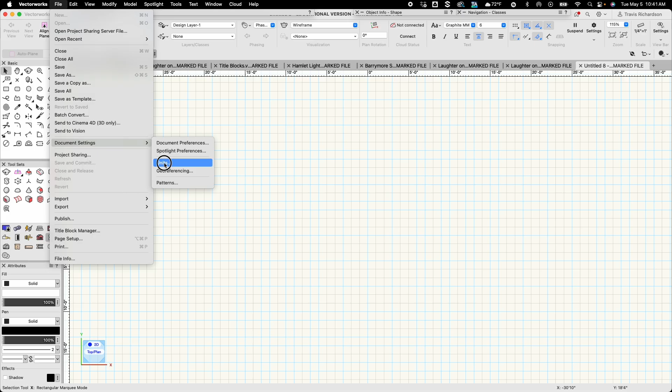So I'm going to start by creating a new file in Vectorworks. It's just going to be a blank document. I don't need it to be a template in this case. And as always, I'm going to come up and change my units to feet and inches, rounding fractional, and the precision 1/8 of an inch. Okay. And I'm going to come over to my attributes palette and change my line thickness to 7. And from there, I'm ready to start.

So as you can see from the example provided, the base of this lamppost is a hexagon that's 1 foot 6 inches across. So for that, I'm going to use my regular polygon tool. From here, I am in inscribed mode. And I want the number of sides to be 6 because I want it to be a hexagon. So because I want it to be 18 inches across and I'm working essentially from the center out on the radius, I'm going to hit Tab and make that 9 inches. And then I'll click to complete that. And there is my hexagon.

I'm going to go ahead and duplicate this and just drag the duplication off to the side. I'll use that a little bit later. And then I'll select my original hexagon again, and I'm going to extrude it 4 inches. From there, I'm going to take my 3D flyover tool and just do this to verify that extrusion. Sure enough, there I've got my extruded hexagon. And for now, I'm going to go ahead and just go back into a top plan view.

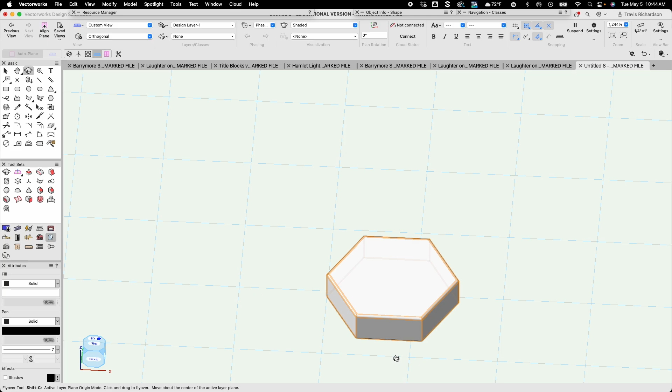I want to set my constant radius for 1/4 of an inch in this case. So once that's all set, I'm going to click on this green check mark. And then again, if I go to my 3D flyover and deselect it, we can see that I now have a rounded edge of my hexagon. For now, I'm just going to go back into a top plan view.

Next, I'm going to draw a circle with either a 1 foot diameter or a 6 inch radius. So I'll activate my circle tool. And in my case, I'm set in radius mode. That's just fine. So I'll tab in and give it a 6 inch radius. There we go. Click to complete that. And I'm going to go ahead and duplicate this circle and drag that duplication onto the 2D hexagon that I drew earlier. Again, I'll use those a little bit later on. And then I'm going to come back and select my original circle again, and I'm going to extrude it 1 inch.

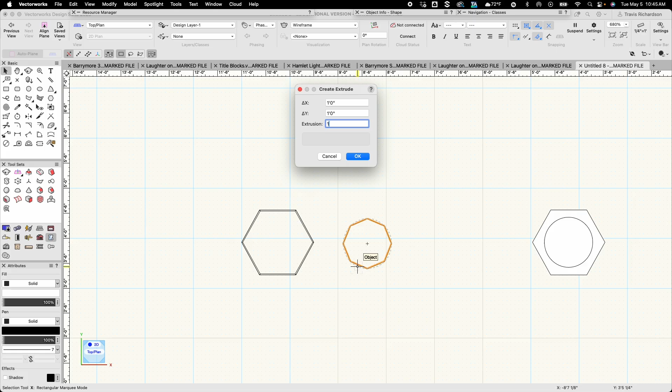From here, I'm going to go to a front view. And there's my circle. And I want to use the Fillet Edge tool again, both on the top and bottom edge of my circle. So I'll select my Fillet Edge tool. I'm going to keep my constant radius at 1/4 of an inch. So I'm going to select the top edge and the bottom edge, and then click the green check.

And now my circle has rounded edges. From there, I'm going to go back to a top plan view. And I'm going to drag this circle into the center of my extruded hexagon. And then I'll go back to a front view and see that it's basically sitting in the middle of it, which is definitely not where I want it.

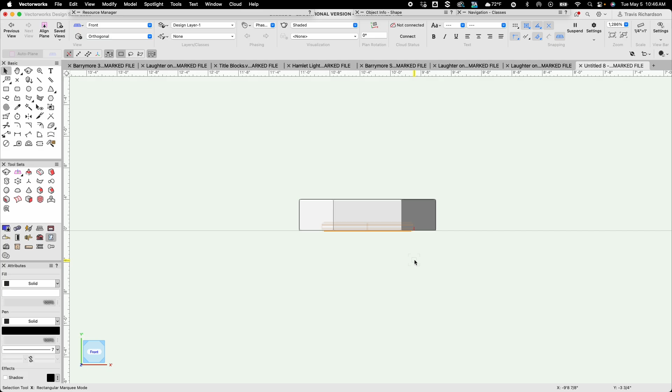So I'm just going to go ahead and move it. I'm going to move it 4 inches on the Y offset. And it's going to set it right on top of that hexagon.

I need one more of those, so I'm going to go ahead and duplicate that circle, and I'm going to move that duplication up 1 inch. Oh, I did that wrong. That was on the x-axis, so I'm going to move it 0 on x, 1 on the y. There we go. Now I have 2 circles sitting on top of my hexagon. And for now, again, I'm just going to go back into a top plan view.

Continuing to work my way up the lamppost, I'm going to go ahead and draw another circle with a 9-inch diameter. So I'll activate my circle tool, and this time I'm going to go into diameter mode, and it wants to be a diameter of 9 inches. So I'll start my circle, tab in, tell it 9 inches, and click to complete that. There we go.

And then I'm going to offset this inside of it. So I'm going to go to my offset tool in my basic tool set. And I want to set my distance to 3/4 of an inch. And then I'm going to click inside this circle so that I'm offsetting to the inside. And it's going to draw me a second circle right there.

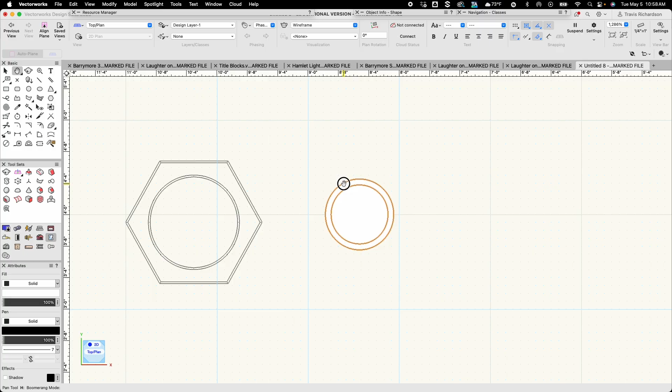I'm going to switch back to my selection tool and select both of those circles. And then I'm going to come up to Modify and Clip Surface. It's going to select the inner surface, which is the one I want to get rid of, and I'll just hit Delete. And now it leaves me with a ring, which is exactly what I'm looking for.

From here, I'm going to activate my rectangle tool. There's going to be a series of rectangles all around this that are going to get extruded later on. So I'll activate my rectangle tool, and I'm going to draw a 1 inch by 1 inch rectangle, and I'm going to grab the bottom center smart point of that rectangle and drag it to the top center smart point of my outer circle.

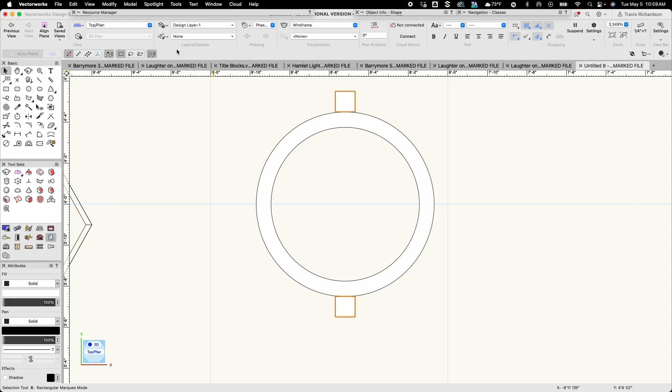There we go. While I still have that selected, I'm going to go ahead and mirror that rectangle horizontally across my ring, so I've got one at the bottom. And then I'm going to select both of those rectangles and duplicate them. And then I want to rotate those duplications. So I'm going to come to Modify and Rotate, and then Rotate again. And I want them to rotate on a 30-degree angle. Okay, and there's my new rectangles.

I'm going to repeat this process 4 more times so that the rectangles surround the entirety of this ring. So again, I'm going to duplicate those, rotate 30 degrees, and one more time. Great. So now I've got all of my rectangles duplicated. So we're going to have 12 total of those.

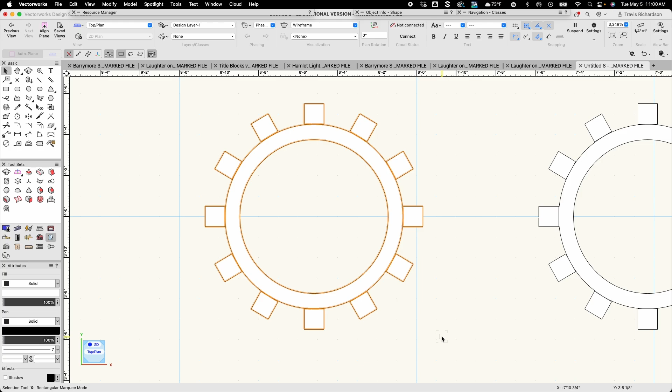From here, I'm actually going to drag a selection marquee around all of these objects, and I'm going to duplicate it like I did before, and I'm going to grab that duplication and just kind of move it off to the side over here. Again, I'll deal with that later on. And then I'm going to draw another selection marquee around my original part to select it, and then I'm going to go ahead and extrude it by 2 feet 3 inches.

I'm going to zoom out a little bit, and using my center smart point, I'm going to click and grab this extrusion and drag it on top to the center smart point of the rest of my lamppost. And then from there, I'll go into a front view, and you can see that new extrusion, but again, it's set down too low, so we need to move that a bit. So I'm going to go ahead and move it 6 inches on the Y offset. So it's going to set on top of that base that we constructed so far.

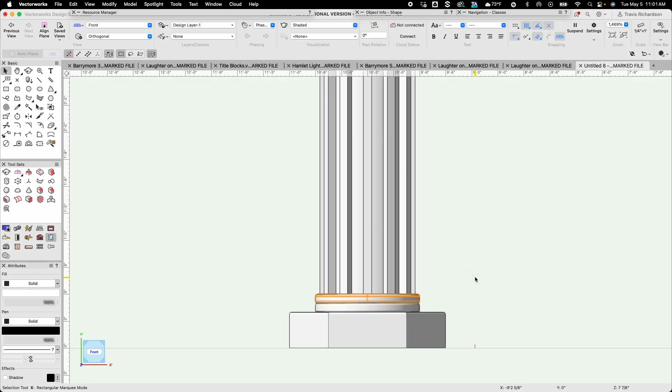From here, I want one of these circles to sit on top of this new extrusion, so I'm going to go ahead and just select that bottom one and duplicate it. And I'm going to move that duplication up 2 feet 4 inches. And then when I zoom out, you can see that it's sitting on top. If I use my 3D flyover, we start to see that lamppost base kind of taking shape.

For now, I'm going to go ahead and return to a top plan view. I'm going to draw a selection marquee around this ring and my rectangles, and group those together so they all act as one unit. Then I'll take that center smart point and drag it to the center of the 2D version I have going on over here.

Continuing to work my way up the lamppost, I'm going to draw another circle. I'll activate my circle tool, and this one I want to have an 8-inch diameter. I'm going to start that, tab in, I'm in diameter mode, so I'm good to go. 8 inches, and click to complete.

There's my 8-inch circle. Like the other ones, I'm going to duplicate that and drag that duplication out of the way for a second. Then I'll select the original circle that I drew, and extrude this by 1/2 inch.

From there, I'm going to go into a front view, and here's my new extruded circle. I'm going to use the fillet edge tool again to round both the top and bottom edges of this. I'll select my fillet edge tool, change my constant radius to 1/8 of an inch, and select both the top edge and the bottom edge of that circle, and click my check mark.

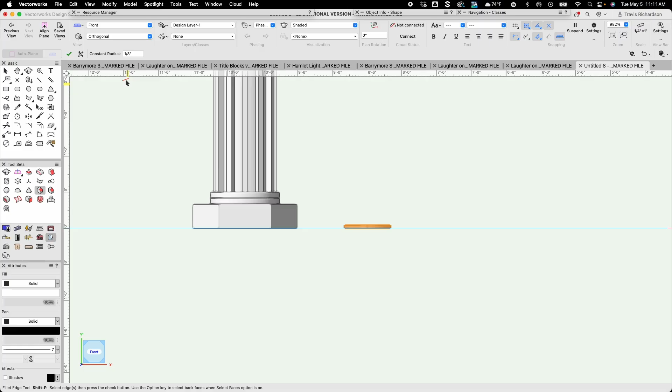From here, I'm going to go back to a top plan view, and with my selection tool, drag the center of this new extrusion on top of the other ones making up my lamppost. Once I have that centered, I'll go back to a front view, and here is my new circle extrusion that's much lower than I want it to be.

So I'm going to move it on the Y offset, 2 feet 10 inches. Then when I pan up, here's my new circle sitting up on top of that pillar.

I need 3 more of those, so I'm going to duplicate that and move it 1/2 inch, and do that 2 more times until I have 4 of those circles stacked up on top of each other. I'm going to deselect that last extrusion and return to a top plan view.

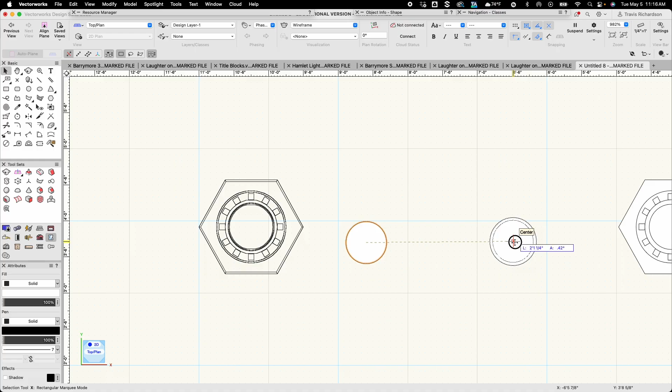Next, I'm going to draw another circle. I'll activate my circle tool, and this time it's going to have a diameter of 7 inches. Once I've set that, I'm going to duplicate it and drag that duplication into the middle of that 8-inch diameter circle I set off to the side earlier. Then I'll click that initial 7-inch circle, and extrude it 2 inches.

From there, I'm going to go back to a front view. There it is. Again I want to soften those edges, so I'll use the fillet edge tool again, switch my constant radius back to 1/4 inch, select both the top and bottom edge, and click my check mark, and there I've got my filleted edges.

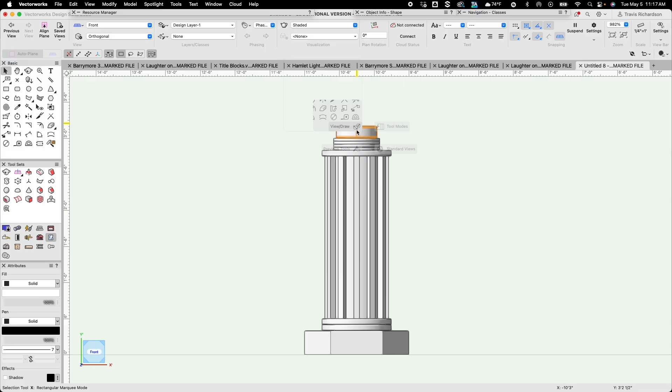From here, I'm going to go back to a top plan view, and using my center smart point, drag that on top of my lamppost, then go back to a front view, and there it is. Again we need to raise that up, so I'll move it 3 feet on the Y-axis, or Y offset, setting it on top of my other objects. For now, I'm going to deselect that and go back to a top plan view.

Next, I'm going to draw yet another circle, this one 3 inches in diameter, so I'll activate my circle tool and set it to 3 inches. Great, there we go. We're going to make a similar shape to what we did earlier, so I'll take my rectangle tool and create a rectangle that is 1/2 inch by 1/2 inch. There we go. Again, using my bottom center smart point, I'm going to drag it to the top center smart point of my circle.

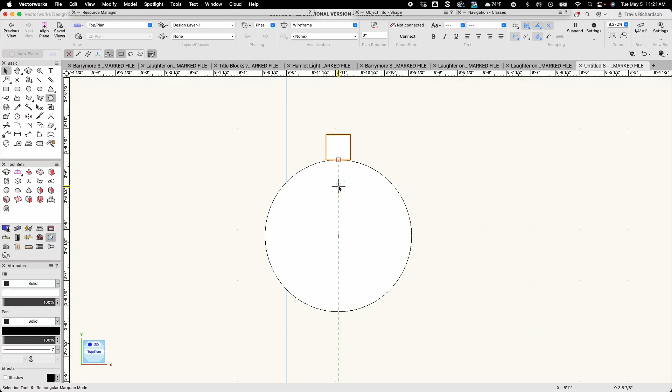Then I'm going to mirror that shape across the circle, and duplicate both of those, and modify, rotate, rotate 30 degrees, just like we did before. I'm going to continue working around my outer circle, duplicating again.

Great, now I've got all of my rectangular duplications surrounding that circle.

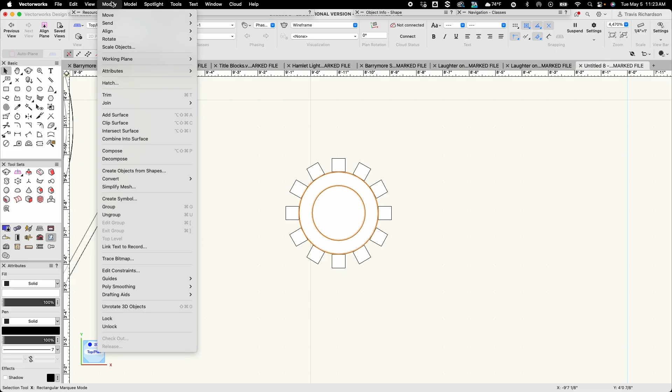From here, I'm going to select my circle and go back to the offset tool. I need to create that ring we had before, so I'll select my offset tool and change the offset to 1/2 inch, and offset this to the middle. Then I'll go back to my selection tool, select both of my circles, and modify clip surface. It's going to select that inner circle, and I'll hit delete, and now I've got the ring I had before.

I'm going to draw a selection marquee around all of these objects and duplicate them again. Just drag that duplication off to the side, then group it with Command G so that's all one group. I'll grab this and drag it right on top of those other circles I had been working with.

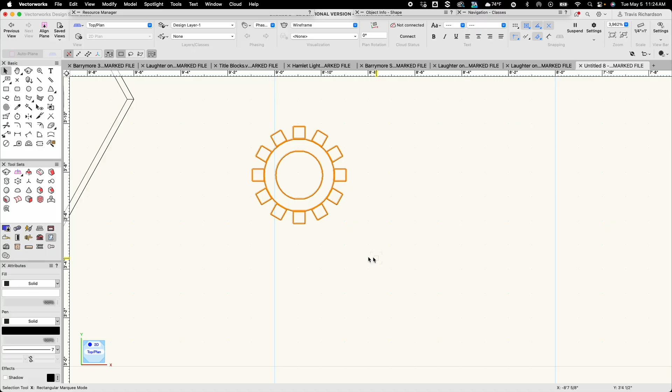I'm going to come back to this original shape I've been working on, and draw a rectangle marquee or selection marquee around all of those objects to select them, and extrude that 5 feet. Once I've extruded that, I'll grab its center smart point and drag it to the center of my lamppost.

Then go back to a front view. There it is. Obviously I need to raise that up, so I'm going to move it 3 feet 2 inches, and that'll set it up on top of that other object. Now my lamppost is really starting to take some shape. For now, I'm going to go back to a top plan view.

Next, I'm going to draw another circle with a 5-inch diameter. I don't need to duplicate this one, but I am going to extrude it 1/2 inch. Then I'll go into my front view and fillet those edges so they're curved, using my fillet edge tool. Because it's only extruded 1/2 inch, I'm going to change the constant radius to 1/8 of an inch, and select both my top and bottom edges and click my check mark.

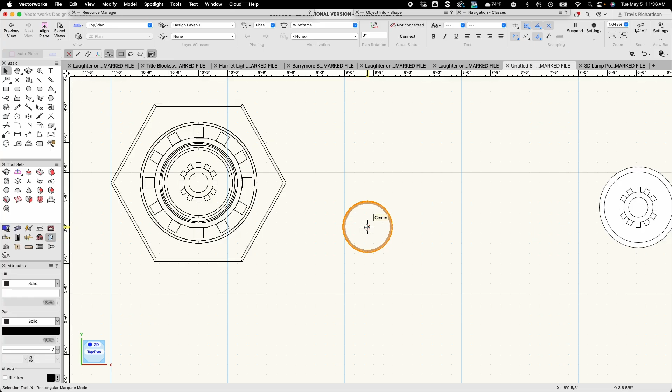From there, I'll go back to a top plan view and center this right on top of the rest of my lamppost, then go back to a front view. Obviously I need to raise that up, so I'm going to move it 8 feet 2 inches, zoom out and pan up, and there's my circle I've just created.

From here, I'll go back to a top plan view and draw another circle that is 4 inches in diameter. Again, I don't need to duplicate this one, and I'm going to extrude this circle by 1/2 inch.

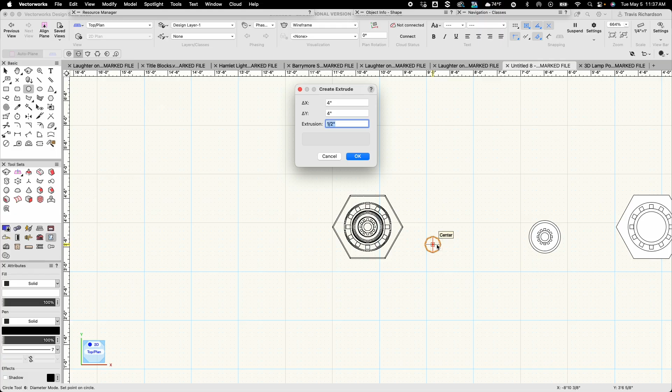Then back to a front view. I want to fillet these edges, so again with my fillet edge tool, changing my constant radius back to 1/4 of an inch, and clicking on the top edge and the bottom edge of my circle, then clicking the check.

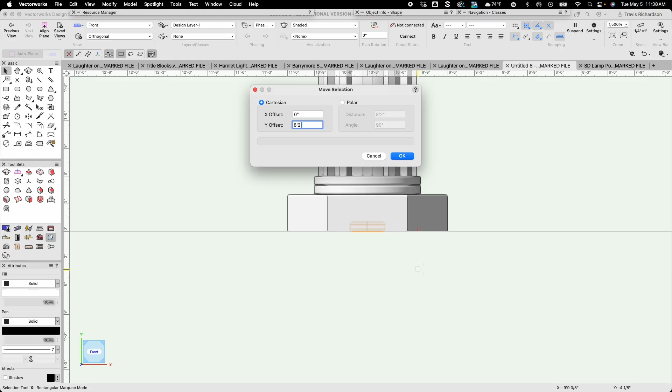There we go. Going back to a top plan view, I'll drag the center of this into the center of my lamppost and go back to a front view. And there it is. I'm going to raise that up 8 feet, 2.5 inches. So there's my newest circle.

I'm actually going to duplicate this one and move it up on top so I've got like a little sandwich. I'm going to select that circle extrusion, duplicate it, and move it up 1/2 inch. There we go, so it's sitting on top. From here, I'll go back to a top plan view.

From here, I'm going to draw a rectangle, activating my rectangle tool, and draw a rectangle that is 6 inches by 6 inches. There we go. I'm going to extrude it by 1/2 inch, then with that extrusion, I'll grab the center and drag it into the center of my lamppost and switch to a front view.

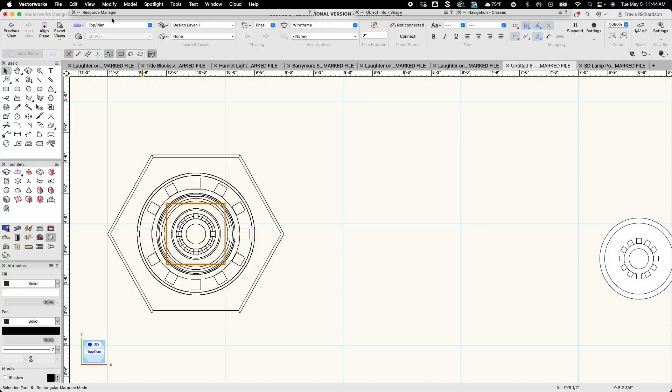Here's my kind of ghosted extruded rectangle that I need to move, so I'm going to move it up 8 feet, 4 inches. Okay, and then when I pan up, there's my rectangle sitting on top of my lamppost.

From here, I'm going to deselect that and go back to a top plan drawing or top plan view. And I'm going to go ahead and save my drawing. Next we'll start working on the lamp housing of the lamppost.

To start my lamp housing, I'm going to go ahead and draw another 6 inch by 6 inch rectangle. Oops, that's a circle. There we go. 6 inch by 6 inch.

And then I'm going to go ahead and offset it by 1/2 inch. So I'm going to select my offset tool, verify that I'm in 1/2 inch, and I'm going to click to the inside of it so I make a smaller surface, smaller rectangle. With my selection tool, I'm going to select both of those and say modify and clip surface. I'll delete that center section.

And then I'm going to select this sort of ringed rectangle, and I'm going to extrude it 1/2 inch.

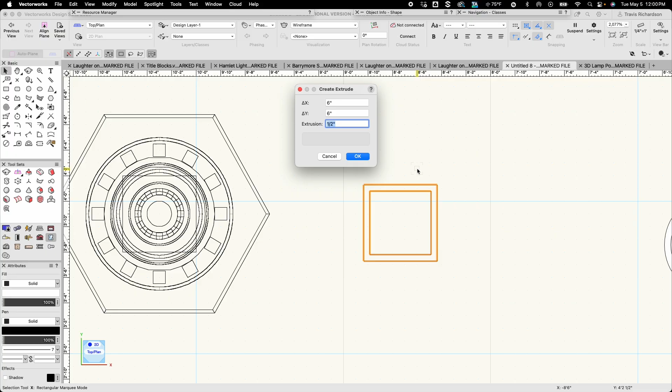From here, I'm going to repeat that process, creating a 12 by 12 inch rectangle right on top of this one. So again, I'm going to take my rectangle tool, and I'm going to say I want it 12 by 12. There we go. I'm going to drag that to the center of this rectangle.

And from here, again, I'm going to offset that inside by 1/2 inch. And I'll select both of those, modify, clip surface, get rid of that. I'll select this one, and I'm going to extrude it by 1/2 inch as well.

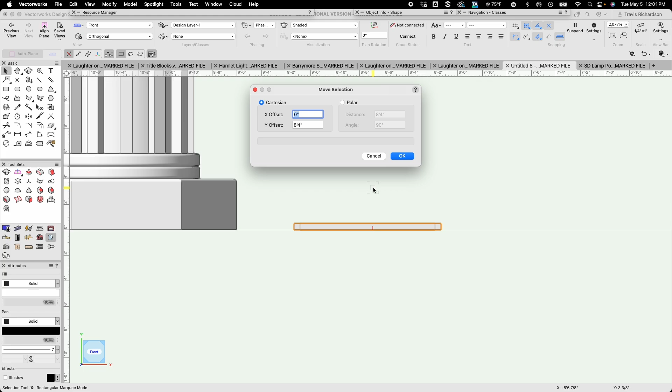Next, I'm going to zoom in on this just so it's a little easier to work on. And I'm going to draw a vertical line from the lower left-hand corner of this lower extruded rectangle. Doesn't matter how long it is, I just need it to come up a little ways.

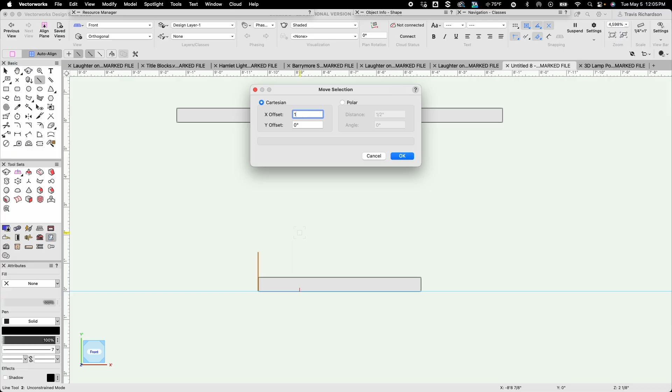And then I'm going to move that line 1/2 inch on the X offset, 0 on the Y, so I'm just moving it over. And really, I'm just giving myself a reference point of this intersection right here.

From here, I'm going to select my polyline tool or my polygon tool, either one. If I select the polygon tool, I need to make sure that I'm in vertex mode. If I select the polyline tool, I need to be in corner vertex mode.

And I'm going to start my polyline at the lower left-hand corner of the top extrusion. So I'm going to click there and tab in and make the first vertex 1/2 inch. I'll click to set that point. And then my next point is going to be the intersection of this line and this extrusion right there.

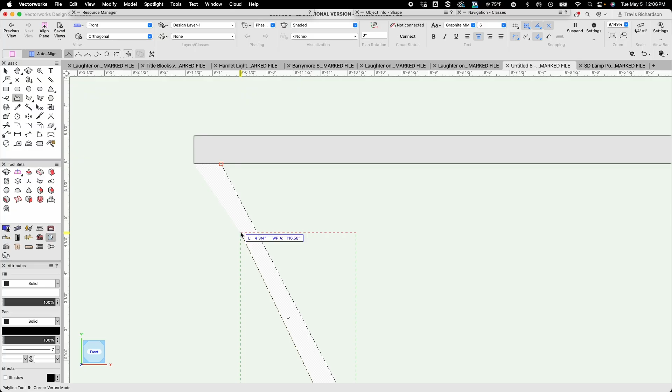I'll come over to the edge of the bottom extrusion and then back up to the corner of the top one to complete my polygon. Then I'm going to select this line that I made for reference and just delete it.

From here, I'm going to have this polygon selected, and I'm going to go ahead and extrude it 1/2 inch. With that still selected, I'm going to switch to a left view.

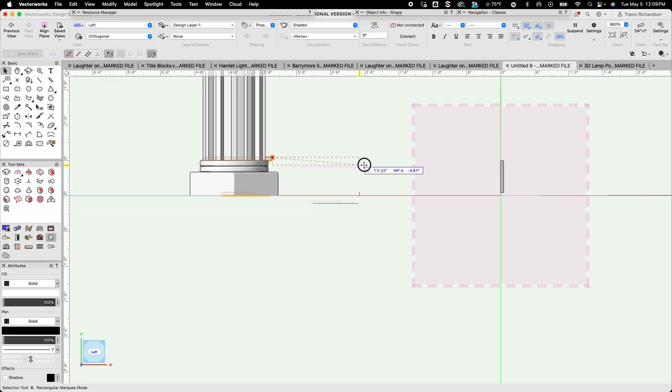And we can see that the polygon that I just drew does not intersect my other two, and actually I can't even see my other two at the moment because they are hidden behind the rest of that column. So I'm going to just draw a marquee here and drag these over so I can see them. There we go. So now I need this extrusion to intersect these two.

So I'm going to grab the endpoint in the top right corner, and I'm going to drag it over till it intersects the bottom right corner of the top extrusion. From here, I'm going to go ahead and go back to a top plan view, and there's the 2D representation of that extruded polygon I just made.

From here, I need to rotate and resize this polygon extrusion a little bit. So with it selected, I'm going to go ahead and grab my rotate tool.

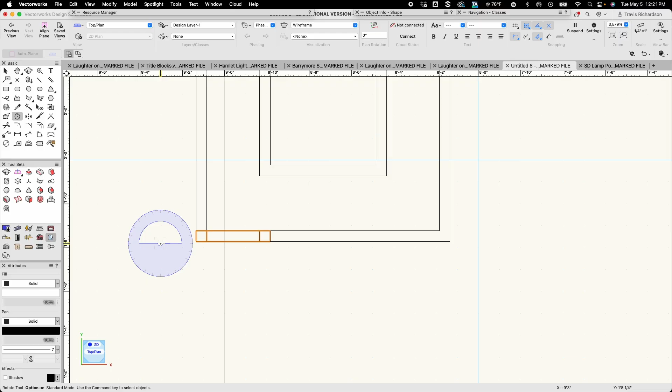And I'm going to grab the left midpoint smart point and click here. And then I'm going to grab the right midpoint smart point. And then I'm going to rotate it till it's even with the corner of the smaller rectangle. There we go. Now I need to resize it so that it extends all the way and connects with those two.

So I'm going to double click to enter that extrusion. And I want to make sure that in my modes, I'm on single object interactive scaling mode. This is going to be the easier one to work with and is also going to be a little bit more accurate. So I'm going to grab this handle, this endpoint handle right here, and I'm just going to drag it till it intersects with the inner rectangle or the inner edge of the smaller rectangle, and click to resize that. And then I'll come up to exit extrude since I'm done resizing it.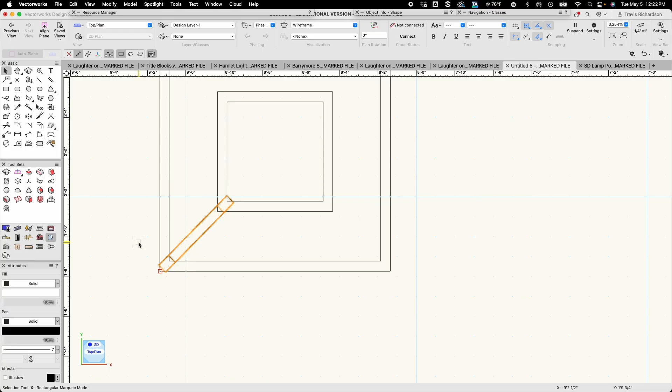And then I need to rotate it one more time so that it's even with this corner. So I'm going to grab my rotate tool again, and I'm going to come from this midpoint to this midpoint, and then click on the endpoint of the larger rectangle to rotate there. From there, I can go to my 3D flyover and do some rotation, and we can see that my polygon is now at an angle and it's intersecting both the upper and the lower rectangles. For now, I'm going to go back to a top plan view.

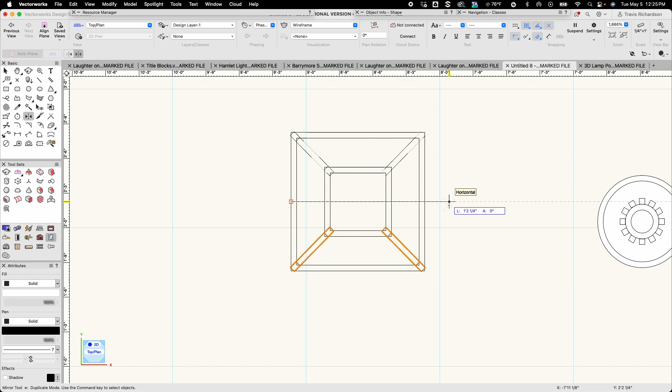From here, I need to mirror this extruded polygon so that I've got one in each of the corners. So with it selected, I'm going to grab my mirror tool, and I'm going to go from the midpoint of this outer rectangle on the bottom and drag it vertically to create this one. And then I will select both of those and select my mirror tool again, and I'll go from the midpoint on the left-hand edge and mirror it that way. So now I've got all four of those. And now again, if I go to my 3D flyover and I do some rotation, we can see how I've kind of created a little basket shape that's going to be the bottom of my lamp housing.

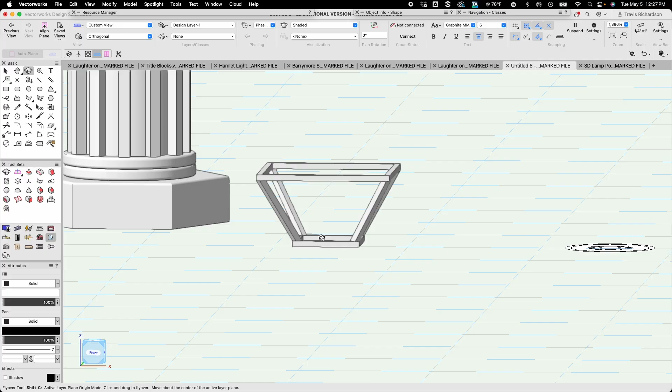Next, I need to turn the bottom of this lamp housing into one solid object. So to do this, I'm going to come to a front view and just draw a selection marquee around all of those elements. Just makes it a little bit easier for them to be selected. And because I'm dealing with a 3D object here, I'm going to come up to Model and Add Solids. And now this should be one solid object that can be moved as one individual thing. From here, I'm going to go back to a top plan view, and I'm going to duplicate this solid, and I'm just going to drag it off to the side near my other duplications to be used later on.

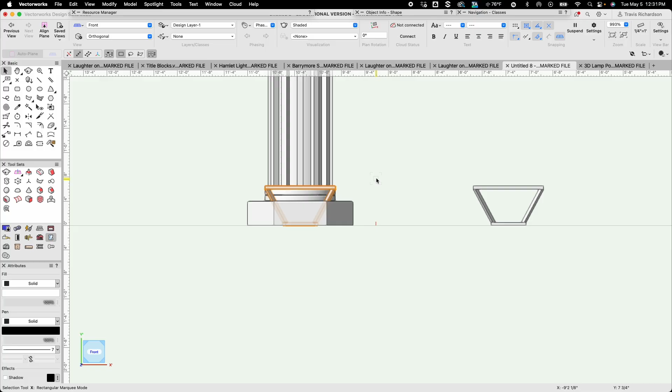Next, I need to move the bottom half of my lamp housing basket up on top of the rest of my lamp post. So I'm going to zoom in and grab the top right endpoint smart point of the smaller rectangle, and I'm going to drag it up and zoom in and place it right on the corner of this other rectangle, and that should center it right in the middle of my lamp post. From there, I'm going to switch to a front view, and you can see here's my basket of my lamp post, and obviously we need to move it up. So we're going to move, and it's going to be 0 on the X offset, and 8 feet 4.5 inches on the Y. And then if I zoom out, you can see that the bottom half of my lamp housing basket is sitting right on top of my lamp post.

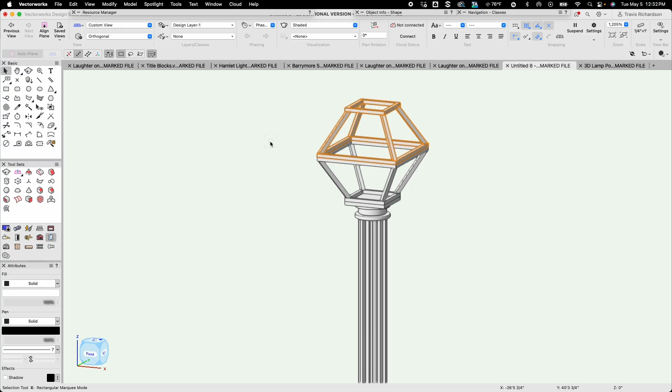From here, with it still selected, I want to mirror it, so I have two halves. So I'm going to select my mirror tool, and I'm going to mirror it right across this top edge so that I have two pieces of that. And just to look at it, I'm going to grab my flyover, so we can kind of see what that's looking like. Looks pretty good. And to finish that off, I'm going to give it a little top cap, so I'm going to come back to a top plan view, and I'm going to draw another 6 by 6 inch rectangle, and I'm going to extrude that 1 inch.

I'm going to drag that into the center of my lamp post and go back to a front view. And I'm going to move this rectangle up 9 feet 5.5 inches. Should put it on the top of my lamp housing. Let's zoom out and see. Yep, there it is. There's the top little cap section of my lamp.

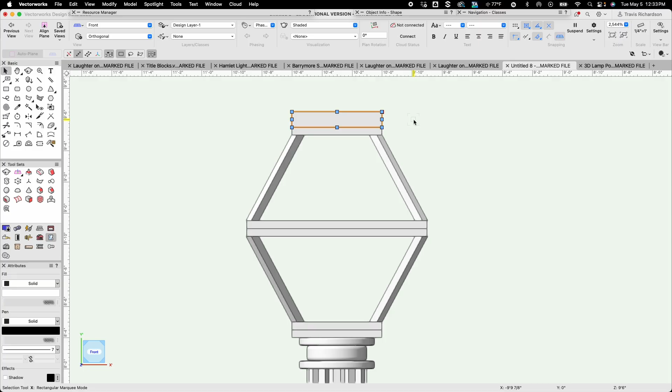For now, I'm going to go back to a top plan view, and next we'll work on the socket for the light bulb. Next, I'm going to work on the light bulb socket for my lamp post. So I'm going to zoom out here just a little bit, and I'm going to draw a new circle that is 2 inches in diameter. There we go. And I'm going to extrude it by 1/8 of an inch.

Okay. And then I'm going to draw another circle with 1 1/4 inch diameter. And I'm going to extrude it 1 inch. From here, we're going to use a new tool in the 3D modeling tool set. It's going to be this one over here. It is the Shell Solid tool. And basically what it's going to do is kind of hollow out the cylindrical extrusion that I just made.

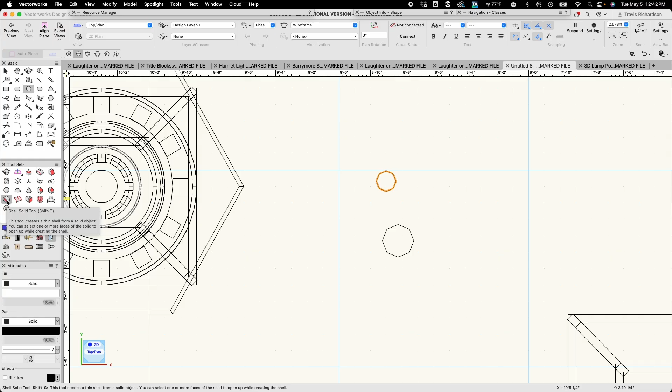So just for point of reference, if we go to our flyover, this is a solid cylinder that I've got. Oops. And I want to essentially hollow part of this out. So going back to a top plan view, I've got that selected. I'm going to select my shell solid tool. I want to change my thickness to 1/8 of an inch if it isn't already. And I'm going to select that circle so it's highlighted and click my check mark.

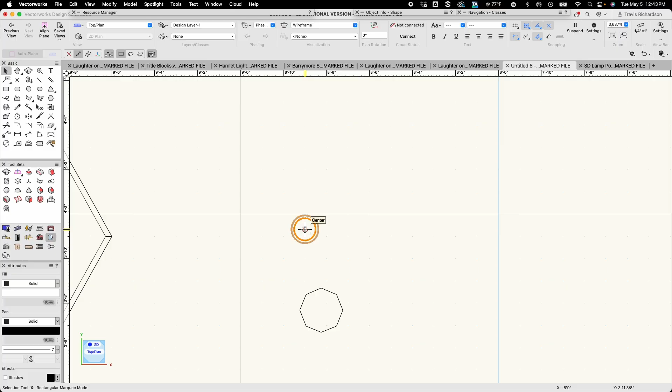And now it looks like a ring, but if I go into my 3D flyover and rotate it, we can see that that is actually kind of hollowed out now, but still has a little bit of a bottom to it. I'm going to come back to a top plan view, and I'm going to grab the extrusion that I just hollowed out and put it on top of the larger one. So that's centered up. From there, I'm going to go to a front view, and obviously I need to lift this up the thickness of its base. So we're just going to move that 1/8 of an inch on the Y offset. There we go.

And now I'm going to select both of those items and turn it into one solid thing. So again, because I'm dealing with a 3-dimensional object, I'm going to say Model, Add Solids. And now that is one entire object in and of itself. From here, I need to position this socket on top of my lamppost. So I'm going to go back to a top plan view. And I'm going to grab the center of the socket I just created and put it right in the center of my lamppost. And then go back to a front view where obviously I need to move it up.

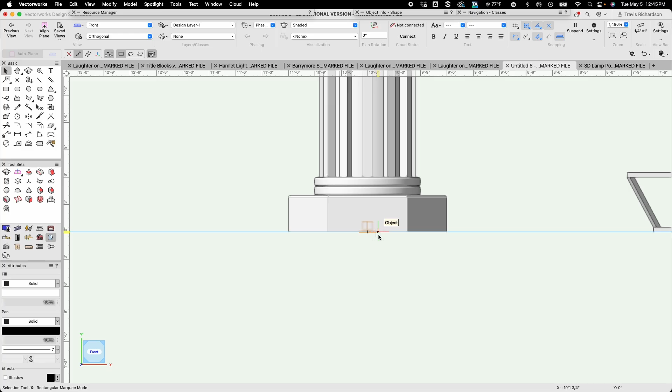And I'm going to move this socket up 8 feet 5 inches. And then when I pan up here, we can see that my socket is basically at the bottom of the basket that I have created as my lamp housing.

Next, I'm going to put a light bulb into my socket, or what we would call an A-lamp. So I'm going to open up my resource manager here. I've already got one set because I've done this once already, but in the search field, if you just search for A-lamp, it'll give you a whole bunch of different options. You want lighting A-19 shell. So you're just going to double click on that one and it'll bring it into the drawing.

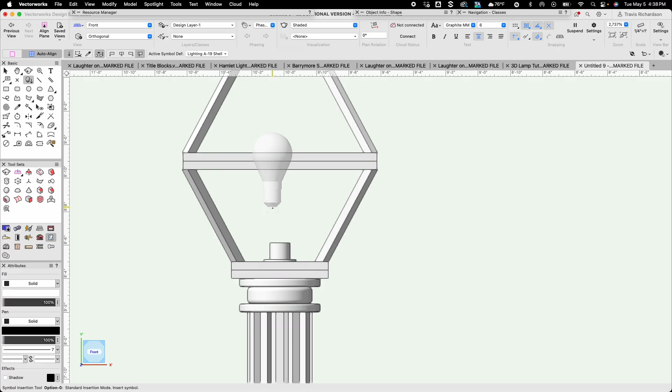You can see that the insertion point is on the bottom in the middle of the lamp. So we're going to zoom in here and I'm going to insert it basically right on the bottom center of that top cylinder making up the socket. So I'm going to click twice to insert my lamp. There we go. And then I need to move it in 3-dimensional space properly.

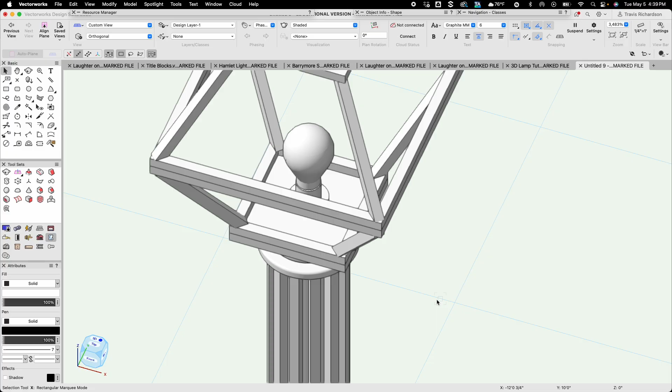So I'm going to go back to a top plan view. And here's my lamp. We can see that it's obviously not centered. So I'm just going to grab the center of it and drag it up to the center of that socket. I'll zoom out a little bit and go back to my flyover. And now we can see that I have a light bulb inserted into my lamppost.

Next, I'm going to work on creating the finial that sits up on top of the lamppost. So for that, I'm going to go to a front view. And to draw this, I'm going to use my polyline tool, and I'm going to put it in Bezier vertex mode. It's the second one over. This is a way of drawing some kind of unique curves. So I'm going to select that.

And I'm going to make my starting point the top midpoint of my lamppost. I'll click to start that and kind of start dragging out the line. And I want the first section to be 3 inches long at a 45-degree angle. So it's going to lock that in for me. I'm going to click on the edge of this circle and bring it back towards center, and you can see how it starts to draw that line.

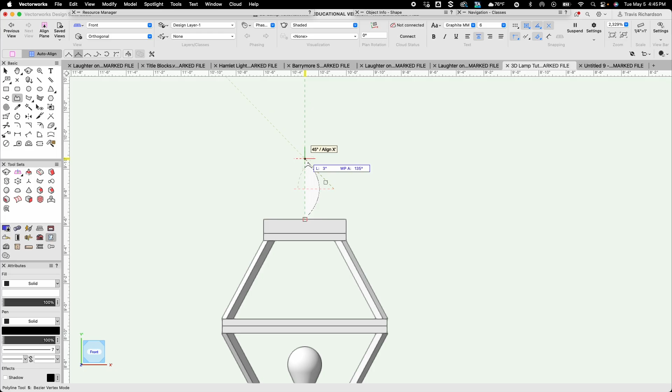So I'm going to hit tab again, and I want this section to be 4 inches at a 120-degree angle. So it's going to show me where that is. I'll click on that point, and I'll keep moving up and out. I want the next section to be 2 inches at a 45-degree angle. So it's going to come out to the side here.

I'll click there. And then I'm going to do one more that's going to be 3 inches at 120 degrees. And it's going to give me that line right there. At this point, I'm going to actually double click on the outside of this circle, and it's basically going to complete that polyline for me.

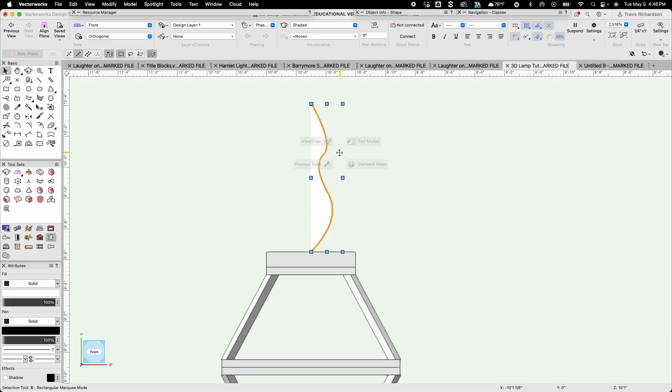Now that's still just a 2-dimensional shape, so now I need to turn it into something 3D, and for that we're going to use the sweep tool, which essentially creates something kind of cylindrical. So I've got my polyline selected. I'm going to go up to Model, because I'm dealing with a 3D object, and select Sweep. This little splash screen is going to come up. It's perfectly fine. We're going to keep these defaults for this project. So I'm going to say OK. And now it has created a 3-dimensional version of that polyline that I just created.

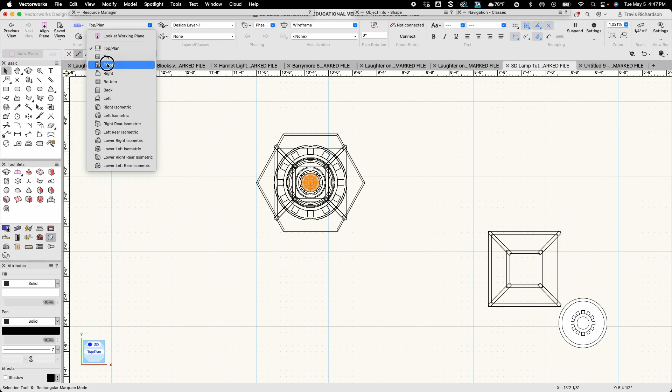With that still selected, I'm going to go back to a top plan view, and as I suspected, it's not anywhere near where it needs to be relative to the lamppost in 3-dimensional space. So I'm just going to grab the center of it and drag it up and put it right on the center of my lamppost. And from there, I'll go back to a front view, and we can see that it's still sitting right on top. But if I do my flyover, now we know that it's 3-dimensionally in the correct location.

Next, I'm going to change the render texture on the lamppost, which is much the same as we've done with some of the 3D theater drawing. So I'm going to start by going into a front view, and I'm going to zoom out, and I'm going to draw a selection marquee around the entire lamppost. And then I'm going to zoom back in and hold Shift and deselect both the light bulb and the socket. So I'll still have everything else selected.

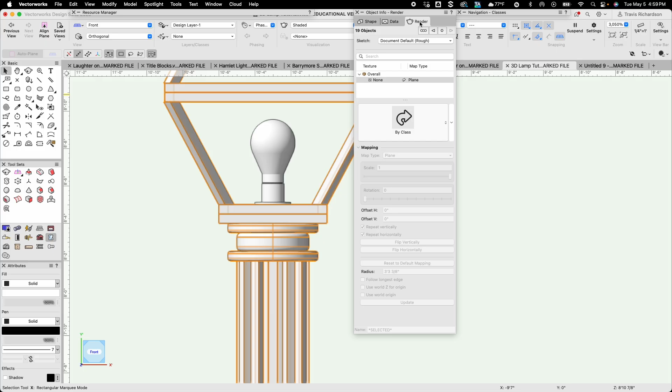From there, I'm going to go to my Object Info palette in the Render tab, and I'm going to click by class, and I'm going to search for asphalt. Apparently I've spelled it wrong. There we go. And I've got my various options here, and I'm going to be looking for Asphalt Black RT, which is this one right here. So I'm just going to double click that, and we can see that our lamppost has now turned black with everything except the socket and the light bulb.

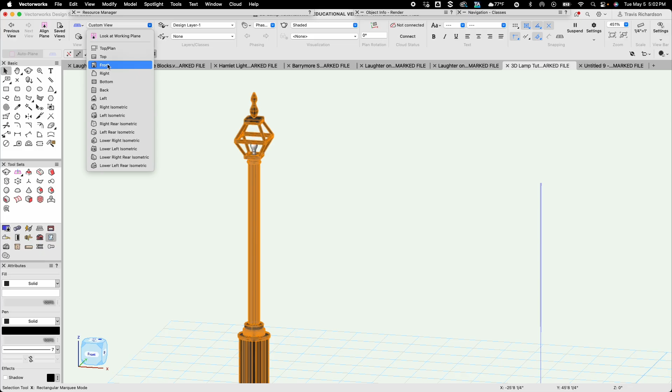Next, I'm going to work on creating some viewports to set up a printable drawing. So from here, I'm going to go back to a front view and just deselect everything. And I'm going to draw a rectangle around the entirety of my lamppost, just like we've done before. And in my attributes palette, I'm going to change both the pen and the fill to none, so I have a transparent rectangle around my lamppost.

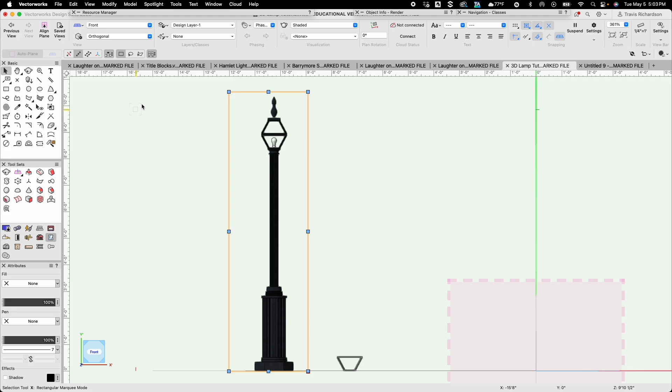And I'm going to come up and click on View and Create Viewport. I definitely want this to be the viewport's crop, so I'm going to say yes. And then I get this creation name. So the name of our viewport is going to be Front View.

In terms of create on layer, I'm going to create a new sheet layer for this. The sheet number is going to be 1, and the sheet title is going to be lamppost, and I'll click OK. I'm going to deselect Use Drawing Label, and I'm going to change my scale to 1/2 inch.

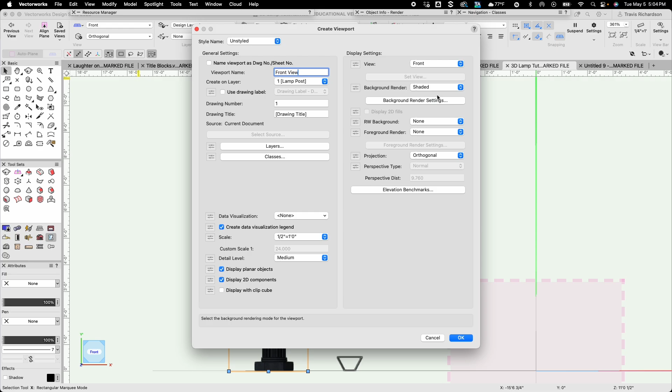And then over here on the right-hand side under background render, I'm going to change it from shaded to wireframe. And I'll click OK. And it's going to create a viewport for me. Now this is obviously on a portrait 8.5 by 11 piece of paper, which I need to change. So I'm going to go to File, Page Setup, just like we've done before. And I want the ASME A, and I'll click OK. And I'm just going to move my lamp post kind of right there.

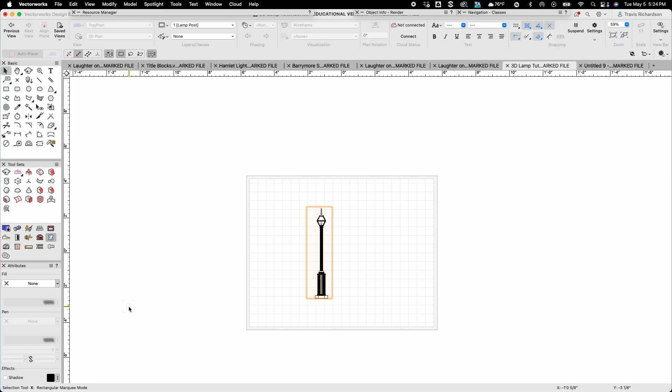From here, I'm going to go ahead and add some dimensions to the front view of my lamppost. So I'm going to double click on that viewport, and I'm going to be editing the annotations. That's correct. And I'll just zoom in here, and I'm going to start on the bottom. So I'll activate my constrained dimension tool and click on either side of the base. And as I'm drawing down, I'm going to tab and tell it 9 inches to place that dimension line.

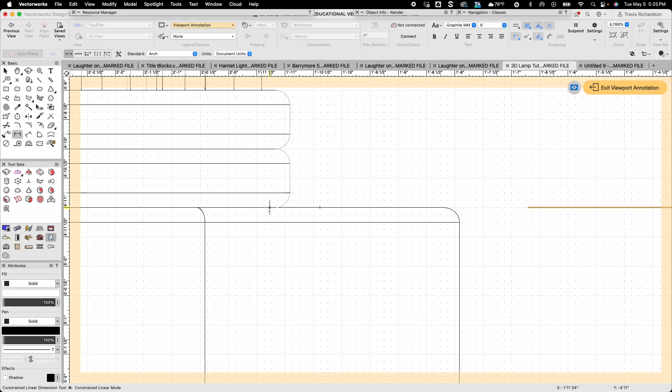There we go. Then I'm going to go from the bottom corner to the top edge. Remember, this is filleted, so there's multiple places that it can grab a dimension from, but we want the very top. So I'm going to select that and come out here to the right. Again, I'm going to hit tab and tell it 9 inches to set that dimension. From here, I'm going to go to the bottom where these rings meet the base, and I'll click there. And I'm going to go clear up to the top of this next section. So I'll click there and bring that out even with this dimension line. So we're at 2'6".

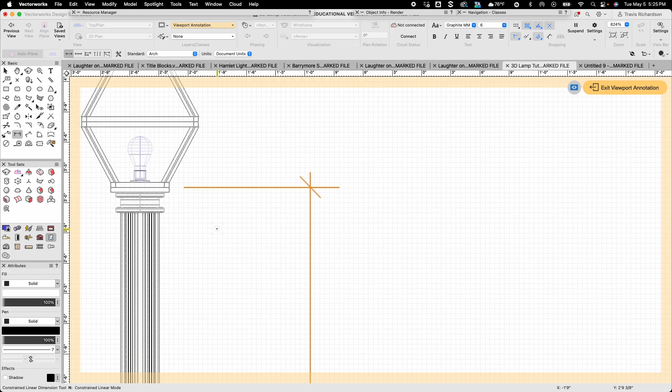Then I'm going to select here where these smaller rings intersect that base. And I'm going to draw a dimension line that tells me all the way up to where the base of my lamp housing is. So I'm going to click here. That's going to give us 5'6½", I believe. Yep, there we go. And then we'll do one that's the overall height of the lamp housing itself, which is 1'2".

And then we'll just do an overall dimension of the entire lamp post. So I'm going to go from the bottom of the base clear up to the top of the finial, and I'm going to bring that out here. Let's bring it out 3 feet. There we go. So 10'4 1/8".

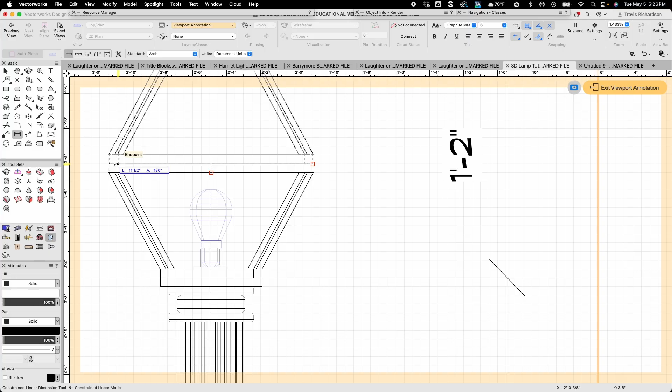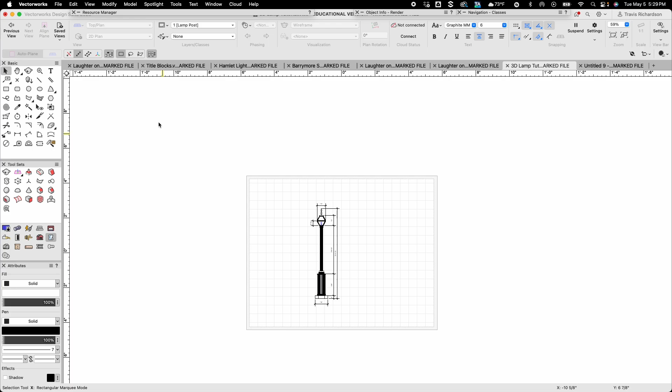Next, I'm going to create a viewport and some dimensions for my lamp cage. So in my layer drop-down menu, I'm going to go back to Design Layer 1, and this time I want to be in a top plan view. And we'll zoom in to where my lamp cage is, and I'm just going to grab mine and move it out of the way because it's kind of close to some of these other things. And again, I'm just going to draw a rectangle around it and change the pen and the fill on those to none. So I have a transparent rectangle, and view, create viewport.

Yes, I want it to be the crop. And we're going to call this lamp cage. It's going to be on the same sheet layer, so that's already selected. It's going to be drawing number 2. That's perfectly fine. I'm going to change my scale to 1/2 inch.

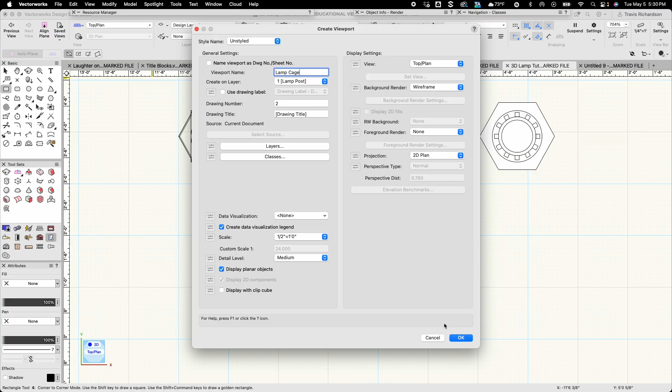And I'm going to leave my background render as wireframe, so I'm going to click OK. So here's my lamp cage. I'm going to move it up so that the center of it is roughly even with the center of the lamp cage itself. And I'll double click to enter into that. Yes, I want to do with the annotations.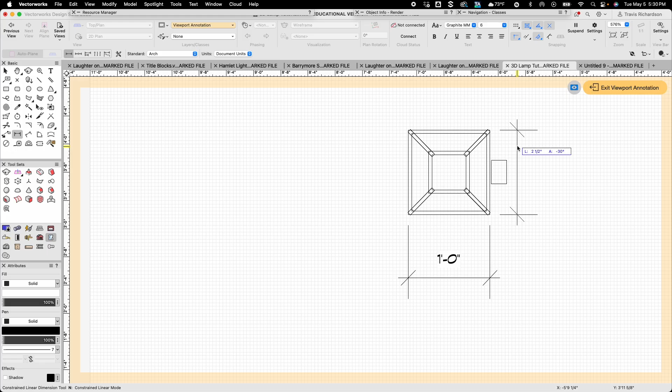And I'll activate my constrained dimension tool. And I'm going to dimension this larger rectangle, which we know is 1 foot. I'll hit tab and move that down 9 inches. And we'll do the other side angle dimension of that cage as well. Again, moving it out 9 inches.

And then for the other two, we'll do the dimensions of the smaller rectangle, which were 6 inches. So I'll do those 2 points. I'm going to drag it out here. Well, we can go 9 inches with that as well. And these 2 points here coming out 9 inches as well. There we go. There's all the dimensions that I need for my lamp cage. So I'm going to exit out of this viewport.

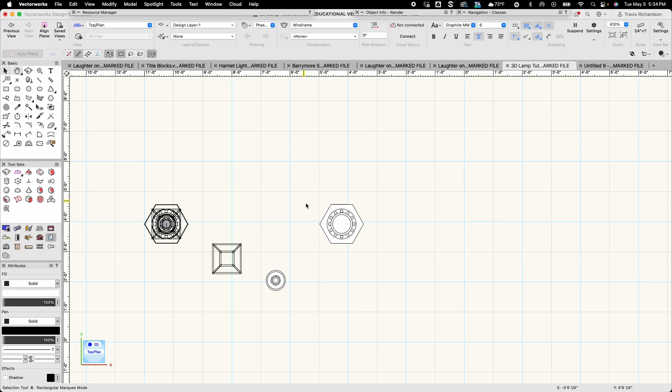Next, I'm going to work on a viewport for my base. So I'm going to go back to my design layer in a top plan view, and I'm going to zoom in here on my base section. Before I do that, I actually want to turn part of this black. So I'm actually going to select the group that is the circles and squares that looks kind of like a gear. And once I have that selected, I'm going to come over to my attributes palette to fill and click on the white color bar and change it to black.

And there we go. From here, like the other ones, I'm going to draw a rectangle around that base and change its pen and fill to none. Again, so I have a transparent rectangle that is the crop area of my viewport. And we'll come up and say view, create viewport. Yes.

And this viewport's name wants to be base. It's going to be drawing number 3 in the lamppost, which is perfectly fine. We're going to change the scale to 1/2 inch and keep the background rendered in wireframe. I'll click OK. And there it's put my base into my drawing.

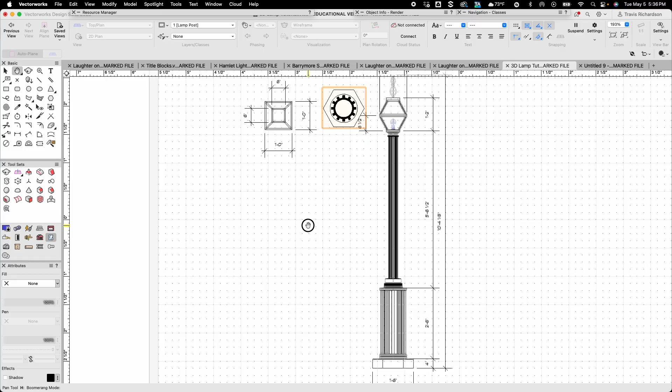I'm going to go ahead and grab it, and I'm going to center it on the lamp cage I did before, and then I'm going to bring it down and put it, let's say, about halfway up the base in that drawing. That looks like a pretty good spot for it, representing that this would be a plan view section of this base portion. From here, I'm going to double click to enter that viewport and create some annotations. So I'm going to activate my constrained dimension tool.

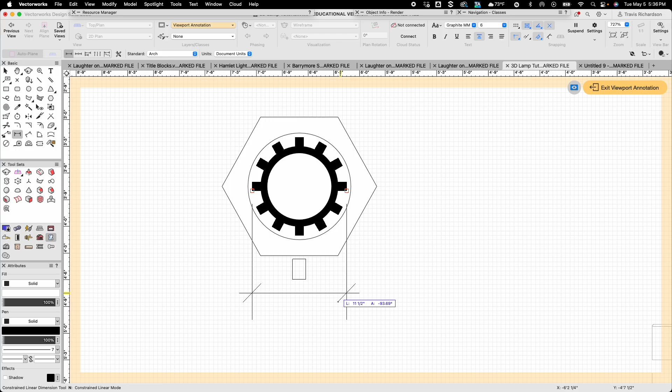And I'm going to go from kind of this little cog to this little cog, which is 11 inches. And let's come down, say, a foot. That'll be fine. And I'm going to do the same thing going the other direction, coming out this way. A foot, that's not going to be long enough. Let's say 1'3". There we go. So I've got those dimensions, and then I need the kind of outer dimension of the circle.

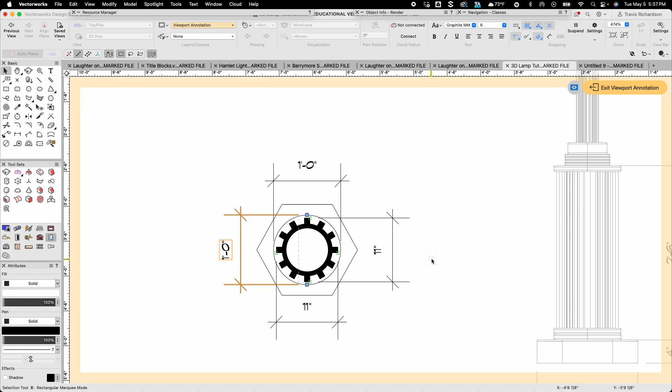So I'm going to click the circle and the circle for a 1 foot dimension, and let's come up 1 foot. Great. And I'm going to do the same thing, top center of the circle to bottom center of the circle, and I'm going to come out a foot. Now we have those dimensions. I don't need to dimension this portion of the base because I've already done it in my front view over here, so that's easy enough to reference. So from there, I'm going to exit the viewport, and next I can work on the post column.

Next, I'm going to do a viewport for the column portion of my lamppost. So I'm going to come back to my design layer, and I'm going to zoom in here on this section of it. And again, I need to change this little cog section to black. So I'm just going to select the whole group and select that white color bar and change it black. There we go.

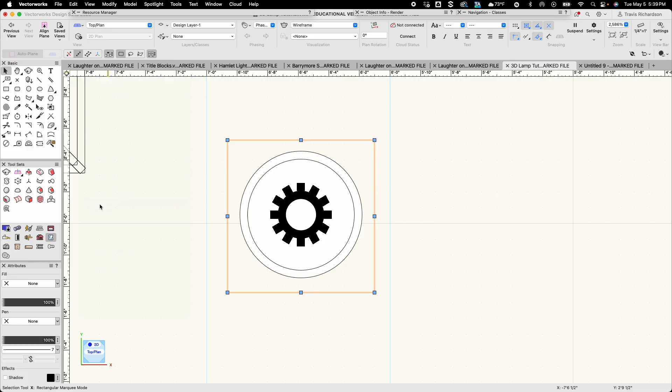And I'm going to repeat that same process we've done before. So drawing a rectangle around that piece, changing its pen and fill, and then back up to view, create viewport, and this is going to be the column.

The layer is going to be lamppost, number 4, that's just fine. We're going to say our scale will be 1/4 inch, and we're going to leave it in wireframe. I'll click OK, and there's my new viewport.

I'm just going to take it and center it on the lamp cage and drag it down so it's about at the midpoint, about halfway down the lamp post, to represent that this is a cross section of my lamp post. I'm going to double click that to be able to annotate it.

With my constrained dimension tool, I'll do the little cog section, which is 4 inches, so we'll move that out 9 inches. And I'll do the same thing going the other direction, again moving it out 9 inches.

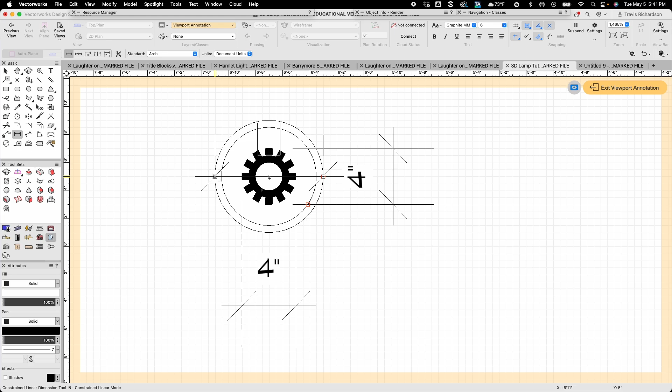That's fine. Then I'm going to measure the outside diameter of this ring, which is 8 inches, and the outside diameter of this one, which is also 8 inches. Great, those are the dimensions and annotations I need for the column section. So I'm going to exit out of that viewport annotation.

Next I'll put together a more rendered view of the lamppost so we can reference what it's going to look like on the drawing when it's finished. To create the rendered view, I'm going to go back to my design layer and be in a front view. I want the entirety of the lamppost, so I'll go ahead and create another viewport, just drawing that rectangle around that whole thing.

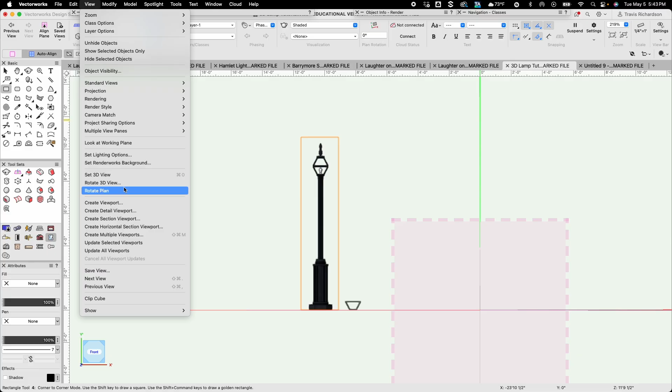Again, pen and fill to none, and we will create a new viewport. This viewport name is going to be rendering. It's going to be drawing number 5.

That's fine. I'm going to change its scale to 1/2 inch again. This time I want to change the background render to shaded. And instead of front - actually we'll just leave it at front for now, we'll do this a different way. I'm going to click OK.

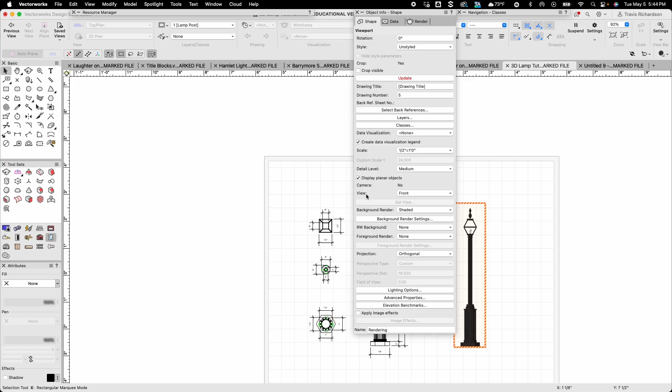And there's my rendering. I'm going to go ahead and just grab it and move it to this right third of the page. Then in my object info palette on the shape tab, I'm going to change the view. About halfway down there's a view section with a drop-down menu, and we're going to do left isometric.

You can see it changed the view of the lamppost, but now not the entire lamppost is inside the viewport. So I'm going to double click on it, and instead of annotations, I'm going to choose crop. I'll click OK, and from here I can grab these handles and change what's visible inside the crop of my viewport.

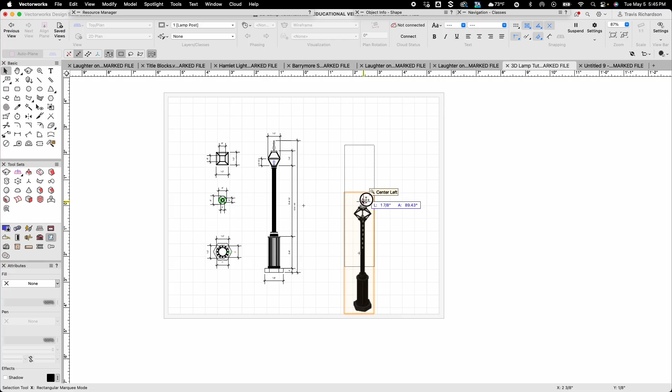I'm going to click Exit Crop, then Object Info, and Update. Now it's updated the entire rendering of my lamppost. I'm going to just grab it and move it up more in line with the rest of my drawing. There we go, and we have an isometric view of what our lamppost is going to look like.

The last thing I need to do for this project is put a border and title block on my drawing and then export it so it can be printed. So like we've done before, I'm going to come up to my resource manager and go to my title blocks file. If your title blocks file is not open, go ahead and open it so you can access those.

I'm going to double click on my ASME border title block file to activate it, and I'm going to place it right in the center of the page. From here, with it selected, I'm going to come up to Object Info and go to the Data tab, and it's giving me the data fields that I can enter and update.

So the drawing name is going to be Lamppost, drawn by - I'm just going to put my initials for now. The scale is 1/2 inch equals 1 foot 0 inches. And today's date is May 5th, 2026.

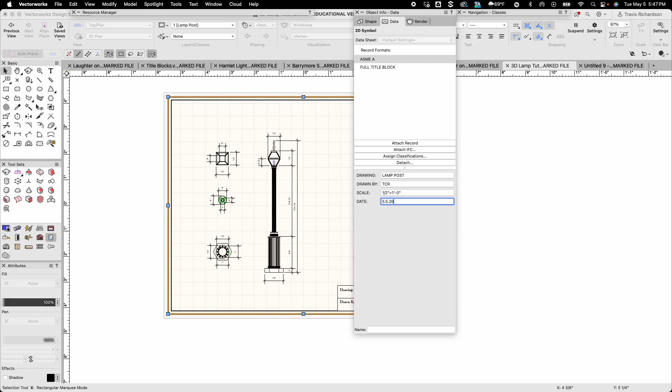Now when I come out of my Object Info palette, we can see that all of that information has been populated. I'm going to fit to page just to zoom in on it and go ahead and save my drawing.

And then from here, I'll export PDF. I'll say export and navigate to where you want to save it. I'm going to save it in Lamppost project.

And I'm going to call it Lamppost Travis Richardson. I'll say save. Do I want to replace it? Yes, I've already done this one, so I'm going to replace that file, and it will generate the PDF of the drawing. From here, you can upload your PDF drawing to Nexus, and you're done with the project.